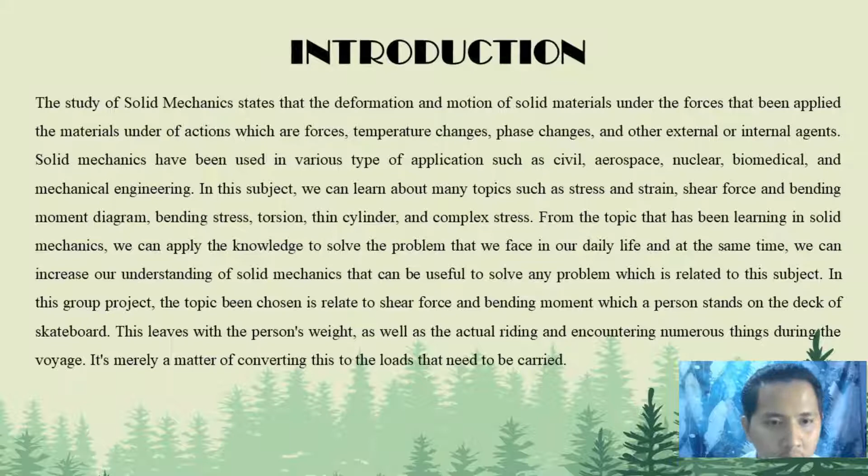The objectives: first, calculate force, moment, stress and strain in a wide variety of structural members subjected to tension, compression, torsion and bending using the formal theory of solid mechanics, and apply various principles to solve calculation problems using various equations depending on the real world problem case. Second, to identify the shear force diagram and bending moment diagram based on a real world problem.

The problem statement: first, to find out 5 real world problems that relate to shear force and bending moment. Second, to calculate the value of shear force and bending moment where a person stands on the deck of a skateboard.

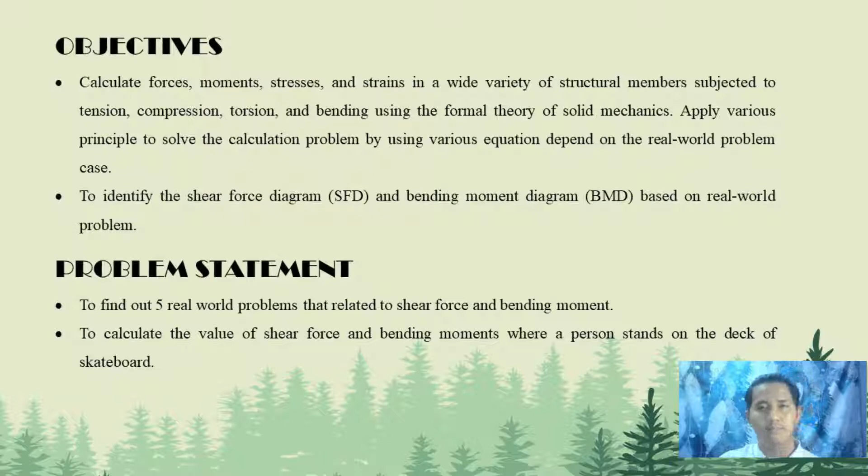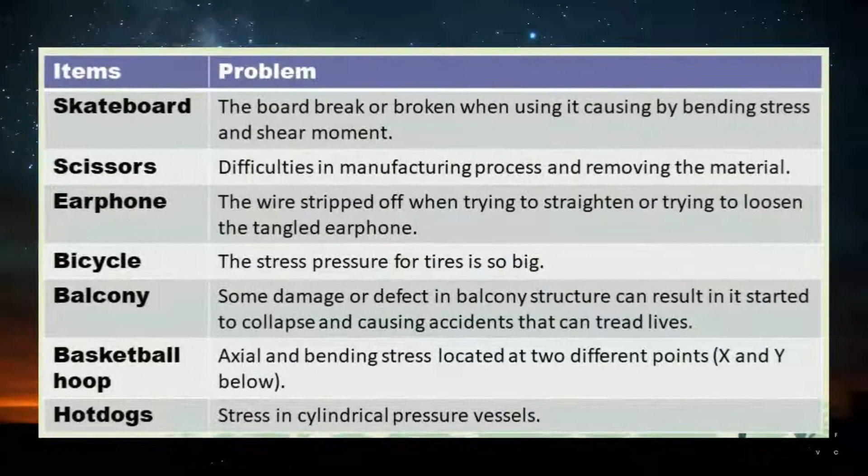Today I will present to you all about the real world problems. In this project, we managed to get 7 real world problems, which I have compiled into this table. Today I will explain 2 different real world problems: first the skateboard and second the scissor.

Nowadays we often see teenagers with a skateboard, riding to school or playing in the skate park. It looks really interesting to see them do new tricks that are really cool. But you will think twice about a hobby like that after you hear that skateboards often break when playing with them, which can result in fatal injuries or even death.

The skateboard tends to break because of the force acting in the middle of the skateboard and also the bending stress. So to prevent the problem, we have to use a suitable material to build the skateboard. Commonly, skateboard manufacturers use wood. But maybe they can use a harder material, for example fiberglass, which is more waterproof, more durable and harder than wood.

As I mentioned, I will discuss the scissor. First, what is the problem regarding the scissor? The problem is the difficulty in the manufacturing process and removing the material, and the scissor is often found in our stationery or in the kitchen. So now I will explain the problem.

About our result. This is a diagram of our explanation in our report, which is the skateboard. You can see we find FA plus FB equal to 36 kg, which is equal to 353.16 Newton. Same goes for FA equals FB equals 18 kg, which equals 176.58 Newton. So we can get L and also the lengths A and B.

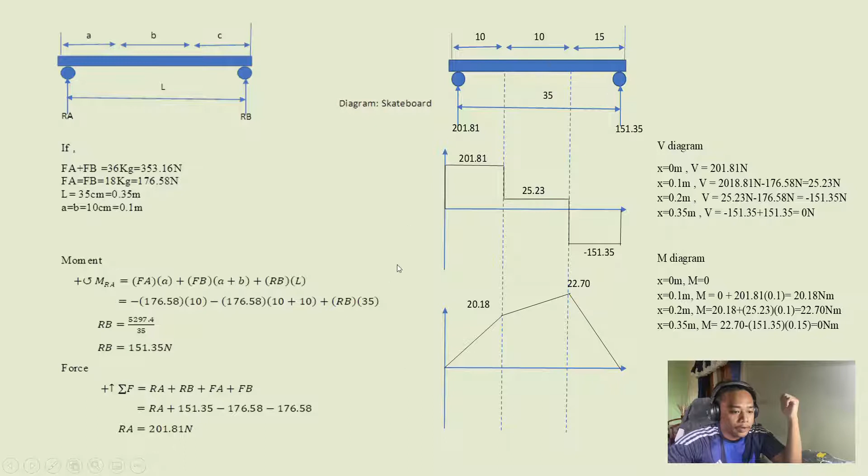So we calculate the moment using L equals 0.35 meters. MRA equals FA times A plus FB times (A plus B) plus RB times L. Just substitute the values and then we can get RB. Same goes for the force. We use the formula, substitute the values that we have, and then we can get RA. The second diagram is used to find the shear force and bending moment. This is the calculation, as you can see.

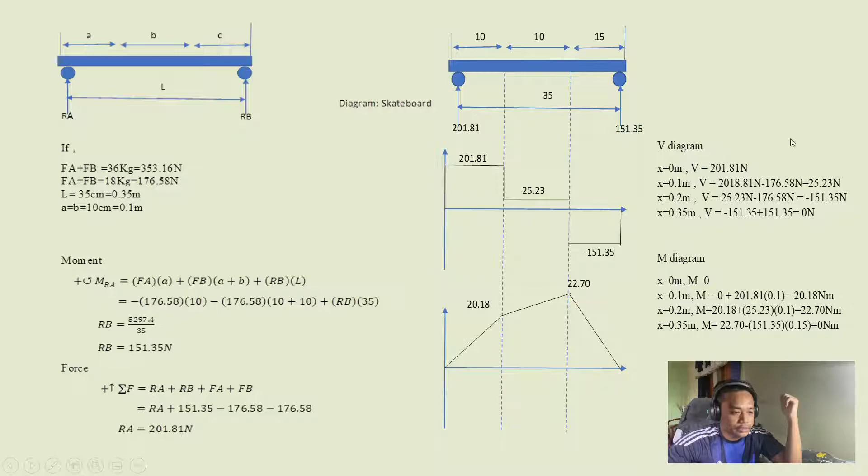Next, the discussion. The discussion is about which point of the skateboard sees the largest shear force and bending moment, where the highest force is 201.81 Newton and the largest bending moment is 22.70 Newton meter. From the result we get, we can find the bending stress for the skateboard. Here is the calculation below.

So the bending stress for the skateboard is 2.5 MPa, so megapascal.

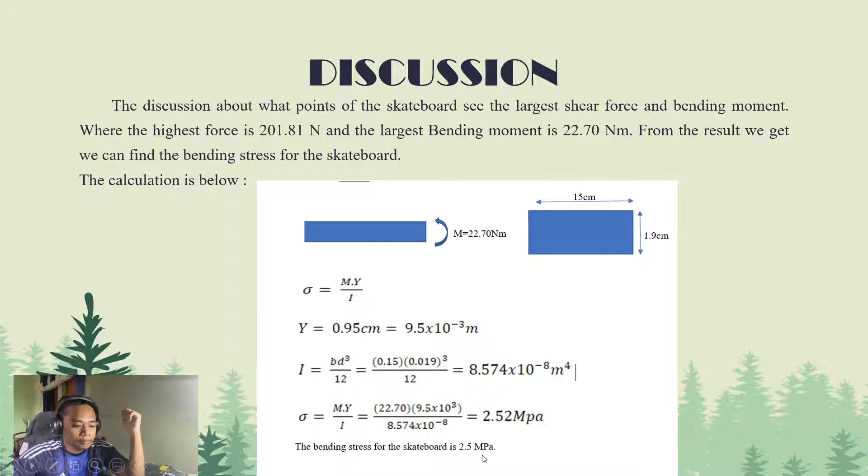So now I will explain a little bit about my part, which is about the method of assessment. First, bending stress is the type of stress that an object or structure experiences when it is subjected to heavy load. This condition can usually happen even in industries that use steel and concrete.

A corrosive attack can also cause the formation of small cracks and dents on the metallic structure. This can lead to more fractures and eventually to catastrophic failure. The effect of a corrosive attack can also cause the structure to bend and crack its load carrier.

Next part is about the introduction of skateboard. In this chapter, the problem that has been chosen for a real world problem is shear force and bending moment on skateboard. Skateboard is used as an example to the real world problem to understand and review the shear and moment diagram. Normal stress, bending stress, shear stress and other types of stress can be used to test the load.

However, in today's report, we are more inclined to look at the load test against the bending stress that a skateboard surface faces, as well as what kind of parameter design is best for different people with different height, load, and shoe size who wish to utilize skateboard in their daily life.

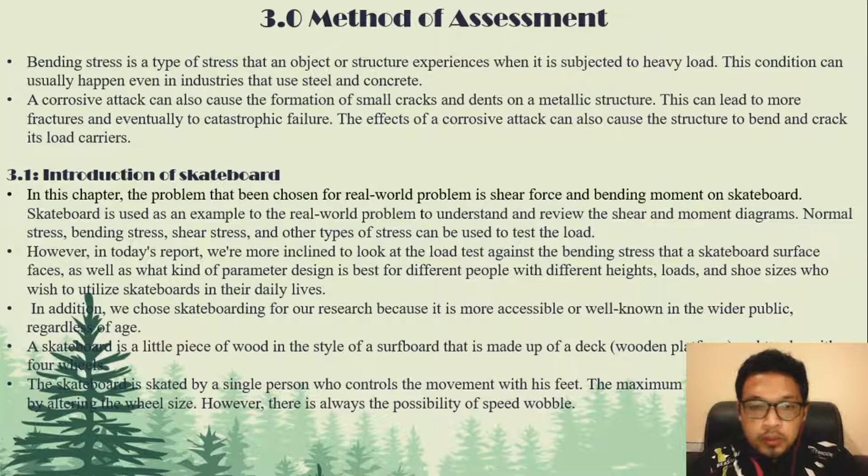In addition, we choose skateboarding for our research because it is more accessible or well known in the wider public regardless of ages. Skateboards also consist of three parts, which are the deck, the truck, and the wheels. Screen printing is commonly used to customize them. Skateboard trucks are often made of aluminum and other metals such as steel, brass, and other alloys. However, nylon is also used.

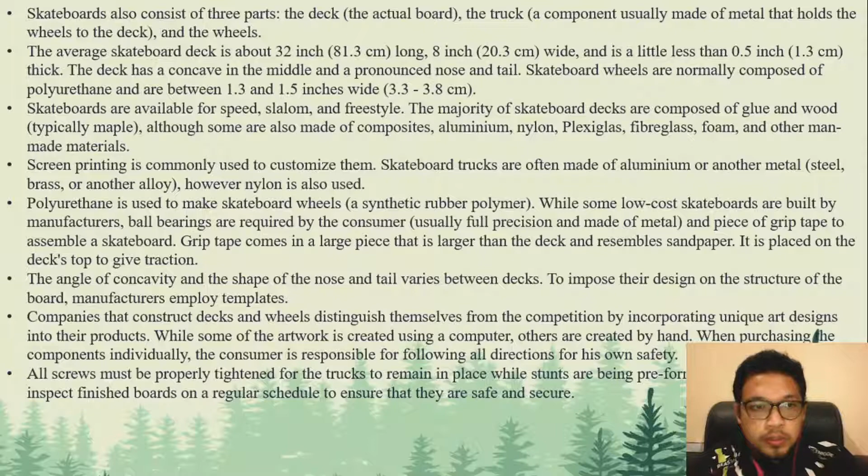The angle of concavity and the shape of the nose and tail varies between decks. To impose their design on the structure of the board, manufacturers employ templates. Companies that construct decks and wheels distinguish themselves from the competition by incorporating unique art designs into their product. While some of the artwork is created using a computer, others are created by hand.

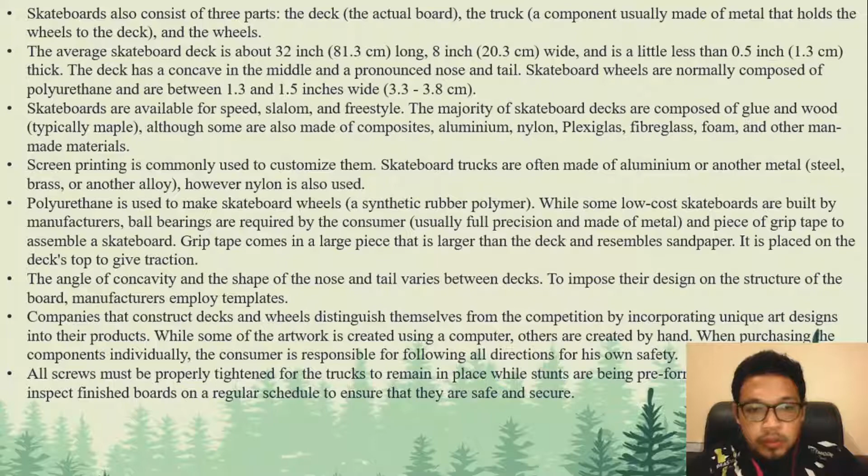When purchasing the components individually, the consumer is responsible for following all directions for his own safety. All screws must be properly tightened for the truck to remain in place while stunts are being performed. Manufacturers inspect finished boards on a regular schedule to ensure that they are safe and secure.

For the last part, it is about the theoretical calculations, which is 3.2. We need to understand the FBD, then we can plot the shear force diagram and the bending moment diagram. For the first diagram, considering the complete beam, for the vertical, RA plus RB equal to P; moment on A equal to PA minus RB times L equal to 0, so RA equal to PB over L, and also RB equal to PA over L.

For the second diagram, considering the cut section as X greater than 0 and less than A, for the vertical, F equal to RA equal to PB over L. For the moment, M equal to RA times X equal to PBX over L.

For the last diagram, considering the cut section as X greater than A and less than L, for the vertical, F equal to RA minus P equal to PB over L minus P equal to minus PA over L. For the moment, M equal to RA times X minus P times X minus A equal to PA over L times L minus X. Okay, that's all from me.

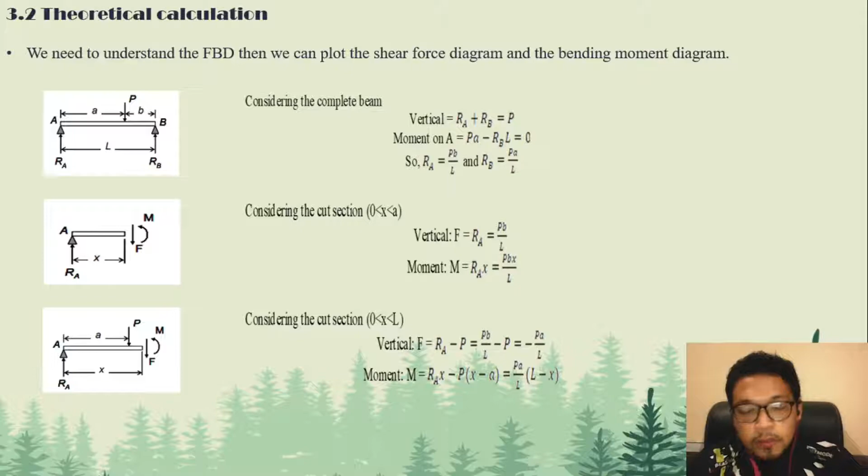As a conclusion, this group project connects students with a basic concept of engineering that students learn in Solid Mechanics 1 classes to examples from their own life experiences. This method is a powerful one to help engage students. This helps students understand the solid mechanics course and enhance the student learning of the application of engineering principles other than just producing calculations in class.

By following the 5 real-world problems, we can conclude that the calculation and the approach of the skateboard are based on the shear force and bending moment. From the analysis of the skateboard, the deck is the main part of skateboard and mostly the strength characteristics and dimensions of skateboards are similar. The deck helps to support and balance the user standing on the skateboard.

We can find that skateboard have two types of load which are shear force and bending moment. The shear force and bending moment is a distance to the point multiplied by the simple force known as loads that act vertically on the frame. Besides, we also calculate the value of shear force and the value of bending moment for the skateboard.